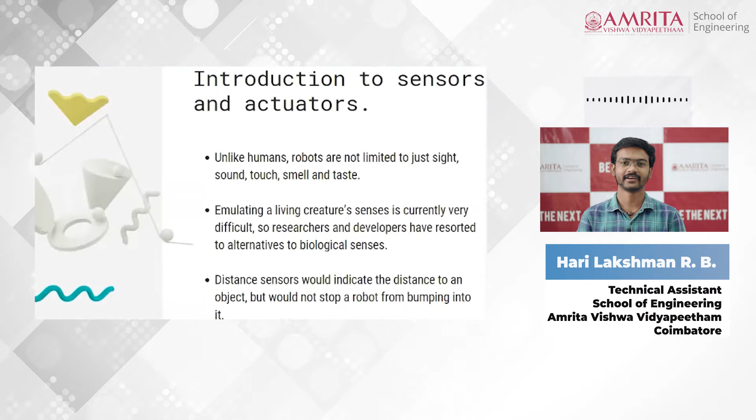A robot with only sensors is just a machine which has nothing but sensors, but it should be programmed and enabled with a proper data set for understanding its environment and itself.

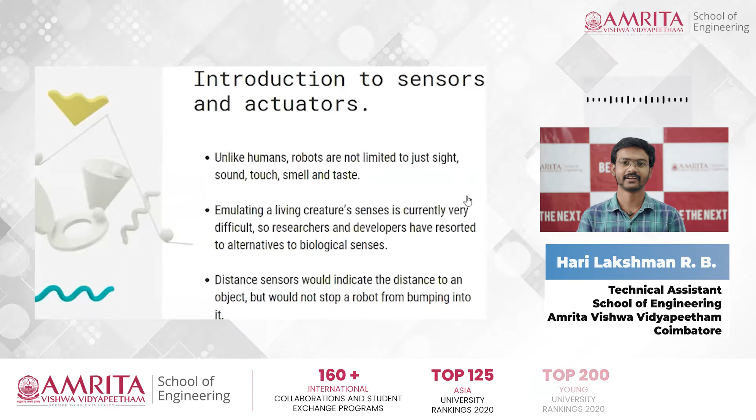The motors that create motion in a robot's articulations are called actuators. There are generally five types of actuators used in robot projects or robotics. I'll be sharing about these five types in the later slides.

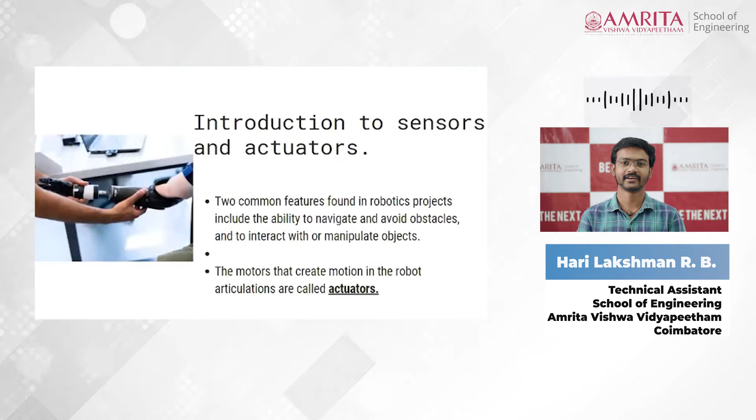Types of actuators can be separated into two categories: based on their energy resources, and based on general types. As general types, as shown in the image, we have DC motor, servo motor, stepper motors, linear actuators, and solenoids. Based on energy source, we have divided actuators into four types: pneumatic, hydraulic, piezoelectric, and some miscellaneous types also. I think you could remember these actuator types, some of which I mentioned in earlier sessions 1 and 2.

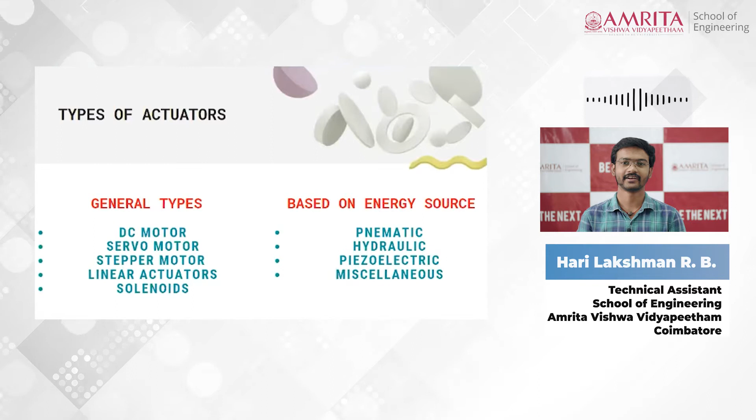We covered pneumatic and hydraulic, how they work and what the difference is between them. Based on the energy source: in a pneumatic system, the energy source is air, and in a hydraulic actuator, the energy source is hydraulic fluid, which can be water, any kind of oil, or what we generally call hydraulic fluid.

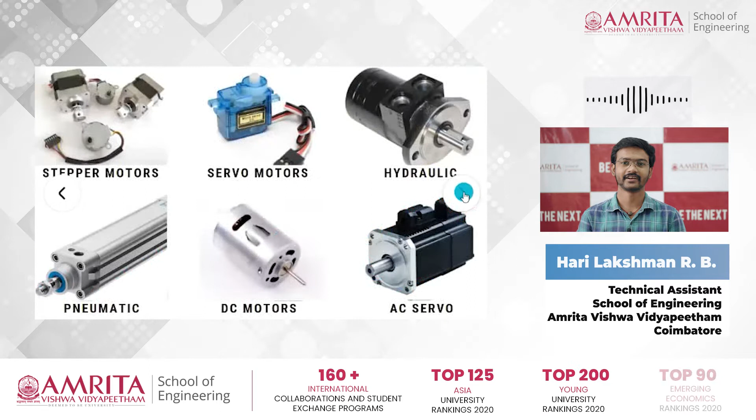We'll be looking into each of a few types of actuators in detail in this session. I hope you could see the image of what a DC motor looks like. A DC motor's output shaft is often mounted onto a pinion or spur or any other type of gear.

You don't need to be worried or confused about what a pinion or a spur or what type of gear it is. As you can see in the image, there is a white projectile outside the main body — a small white gear. That's the small gear which we call a mini gear or micro gear, attached to the motor, and the stick popping out from the main body of the motor is what we call the pinion.

That's how it looks. So it is generally geared to an electronic speed controller that sets the motor speed and direction of rotation. DC motors and other actuators are available in a variety of sizes, as you could see in the image, and also have a variety of torque handling characteristics.

Torque is basically a force which we call into action when an object is in rotation. Just make a note of this, and you can Google it, or if you're an engineering student you would have already understood what torque is. It's technical, but you don't need to study all of it. I'll be explaining what a DC motor is and how they are used in this session, not only about DC motors but also about a few types of actuators.

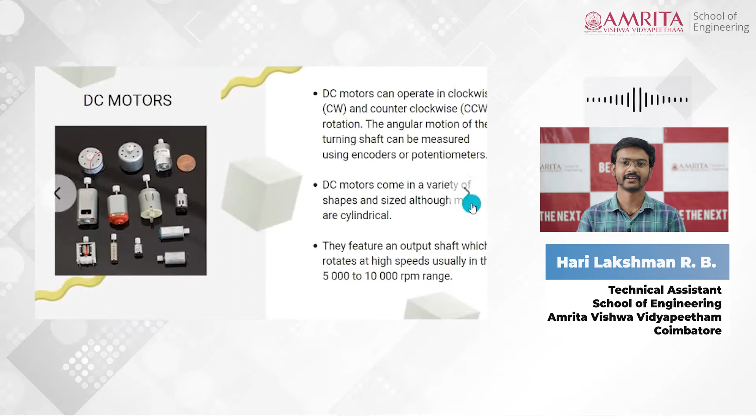Now let's look into servos. Broadly, servos are used everywhere. There are actually two types of servo in general: you can call it a hobby or RC servo, and the other is the industrial servo.

A servo is basically a component with a DC motor, where the output shaft and control circuitry are packaged into one single unit. Servos usually provide rotational movement, except for continuous rotation servo variants that can rotate 360 degrees. As I said earlier, there are two types: RC servos and industrial servos.

RC or hobby servos are types of actuators that rotate to a specific angular position and were classically used in inexpensive remote controlled vehicles for steering purposes and controlling flight surfaces. Now that they're used in a variety of applications, the price of hobby servos has gone down significantly, and the variety has increased, like the sizes of servos, the technologies used, and also the strength of the servos.

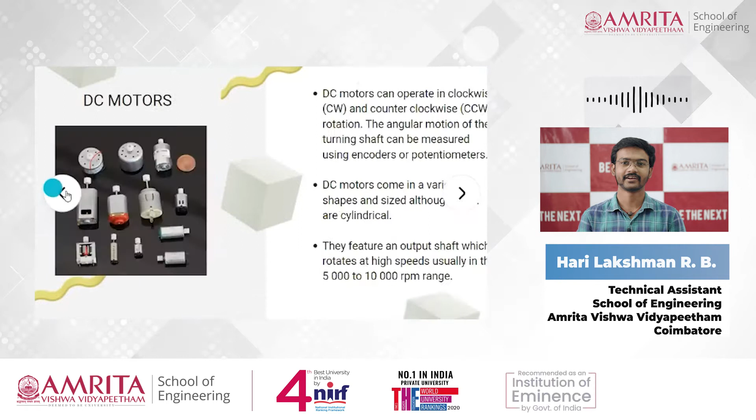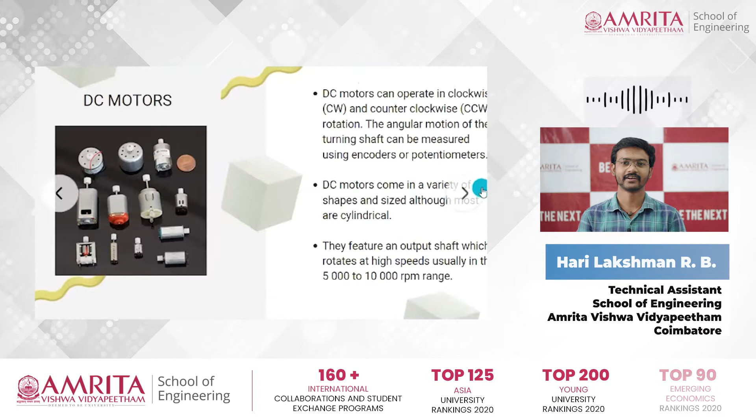The common factor to most servos is that the majority only rotate about 180 degrees. A hobby servo motor actually includes a DC motor, a gearing system, electronics, and a rotary potentiometer in order to measure the angle. As I mentioned earlier with DC motors, the angular motion of the shaft can be measured using encoders or potentiometers. Same goes for servos, where a potentiometer or an encoder is built into the RC servos or hobby servos in order to measure the angle.

These servos generally have three wires, as you could see in the image, though it's a bit hazy there—you could notice three wires coming out of the motor. These three wires are for ground and voltage purposes and for control purposes. Two wires are for positive and negative terminals, and one wire, which in general looks yellow, is used for the control pulse, in the sense that it's attached to a microcontroller or any kind of controller, and the angles or commands are given from the controller to the motor through this yellow wire.

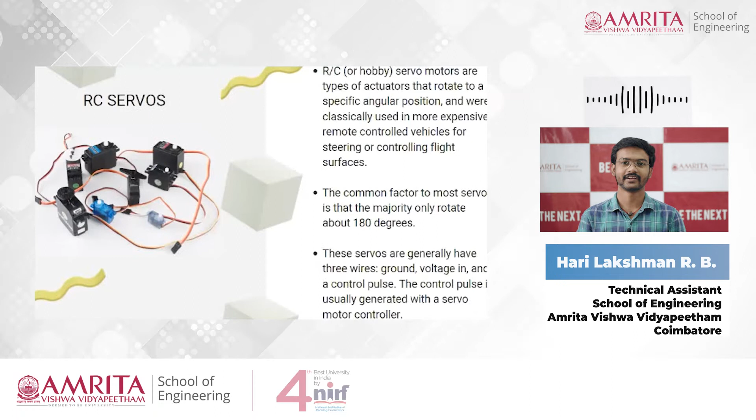In general it is yellow, but the color may be different for different servo motors. The control pulse is actually generated with a motor controller. A robot servo is a new type of servo that offers both continuous rotation and position feedback, and all servos can rotate counterclockwise as well as clockwise.

Now that we've covered servo motors, let's look into what an industrial servo means. An industrial servo is controlled differently than the hobby servo motor, and it is more commonly found on very large machineries. An industrial servo motor is usually made up of a large AC motor, which is sometimes three phase, a gear down, and an encoder which provides feedback about angular position, and speed also comes in within an industrial servo motor.

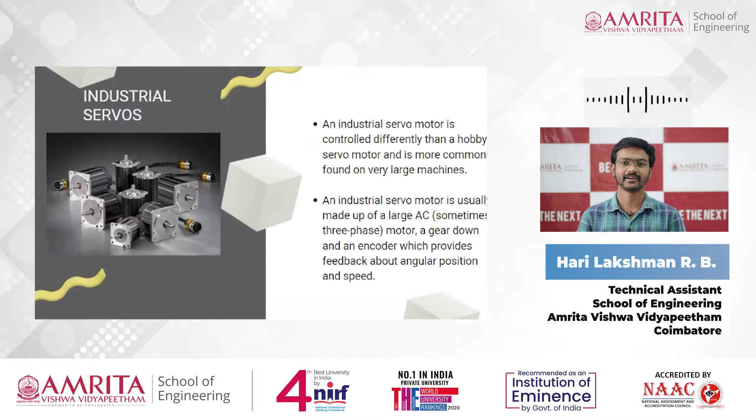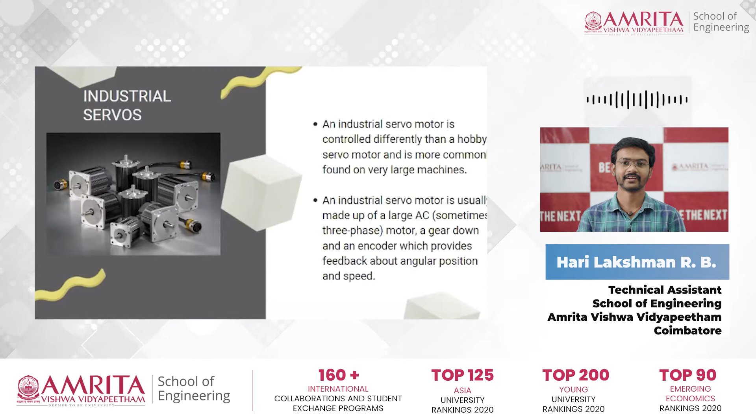These motors are rarely used in mobile robots because of their weight, size, cost, and complexity. Because these servos are generally very large, and they provide a very high cost and complexity, and they also weigh a lot, you might find an industrial servo in more powerful industrial robotic arms or very large robotic vehicles.

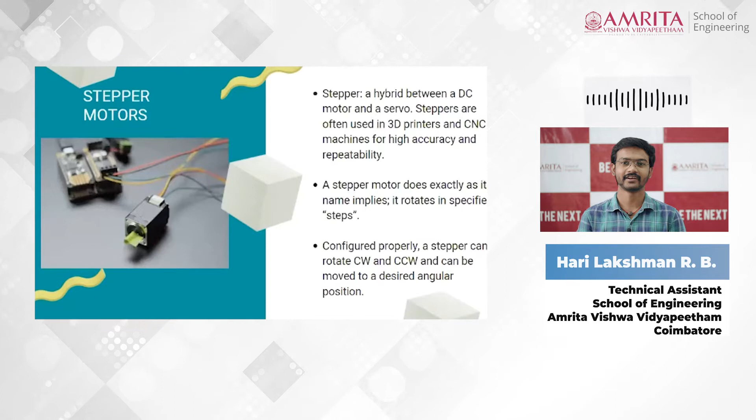Most stepper motors do not include gearing systems, so just like a DC motor, the torque is often low. Configured properly, a stepper can rotate counterclockwise and clockwise and can be moved to a desired angular position precisely. The main advantage of having a stepper motor is that precise angular position can be obtained because it moves with specified degrees, or the steps which it takes are based on the degrees which we give. The degrees in the sense are angles 0 to 360.

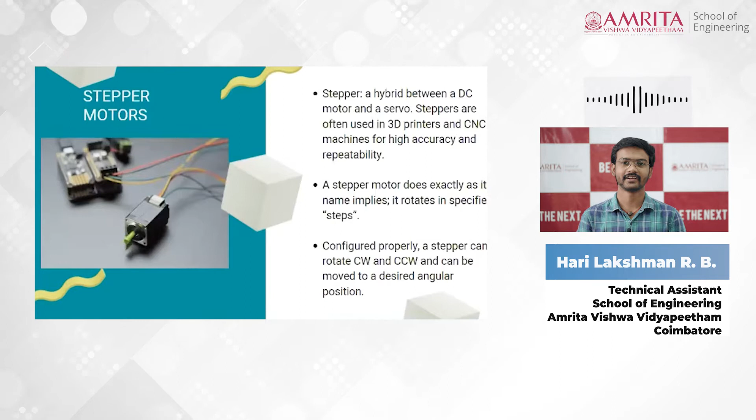Stepper motors are often used in 3D printers, CNC machines for its high accuracy and repeatability. It is often where a low torque output is also sufficient. In general, a stepper motor is nothing but a hybrid between a DC motor and a servo motor, because like a DC motor it doesn't have any gearing system and it provides low torque, but like a servo motor it provides accuracy, and this is a bit more accurate than a servo motor.

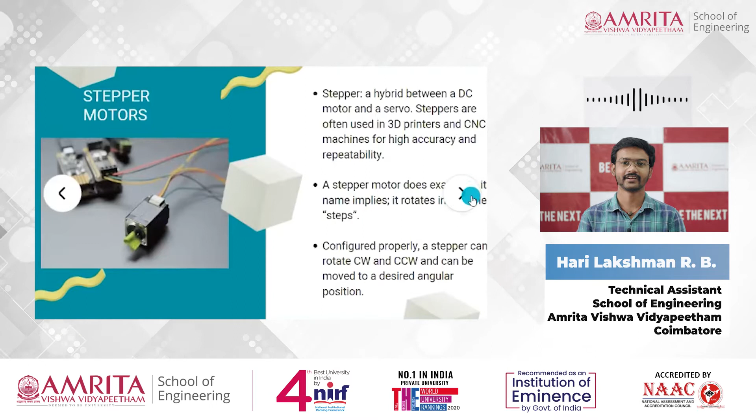Now let's talk about linear actuators. A linear actuator is similar to a servo but provides linear motion. It is often achieved through linear mechanisms such as worm drives. Mechanical guys obviously know what a worm drive is. Please do make a note of it if you don't understand what a worm drive is, because if I explain a bit about it, it will take much more time, as I have a lot of scope to complete in this session. So a DC linear actuator is a type of linear actuator which I'll be concentrating on as of now.

It is often made up of a DC motor connected to a lead screw. As the motor turns, so does the lead screw also turn. A traveler on the lead screw is forced either towards or away from the motor, essentially converting the rotating motion to a linear motion. So that conversion happens here - I mean the rotation to a linear motion.

Some DC linear actuators incorporate a linear potentiometer, which provides linear position feedback. This means that a linear potentiometer is used for measuring the position of the lead screw or the position of the actuator. As you could remember in the earlier slide, I mentioned about encoders and potentiometers - those are used to measure the angle and distance, and that's what feedback means.

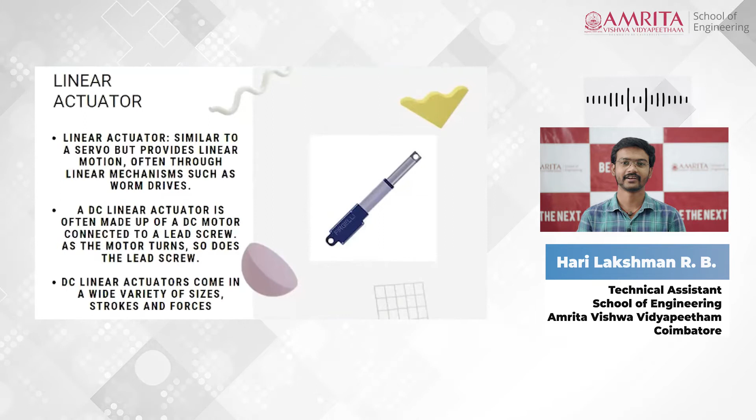In order to stop the actuator from destroying itself, many manufacturers include a limit switch at either end, which cuts the power to the actuator when it is pressed. So DC linear actuators come in a variety of sizes and strokes, and in different forces also.

Multiple coils or mechanical arrangements would be required to provide motion in two directions. A solenoid's stroke is usually very small, but its response speed is very fast.

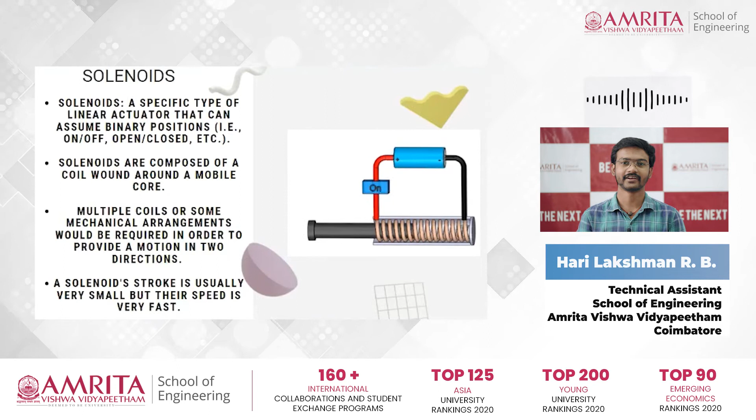The strength depends mainly on the coil size and the amount of current passing through it. Solenoids are typically used in valves, latches, locks, and push buttons, usually controlled by an external microcontroller. These actuators are generally used for on/off, or binary position purposes.

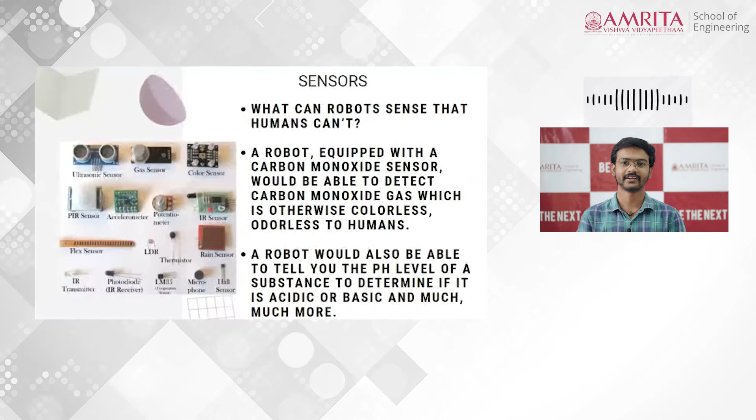So what can robots sense that humans can't? That's the first question we need to think about. Although a robot cannot tell you if a substance tastes good or an odor smells bad, the steps involved in analyzing chemical composition can give it far more information than a normal human being. A robot equipped with a carbon monoxide sensor can detect carbon monoxide gas, which is otherwise colorless and odorless to humans.

These types of sensors are used for purposes where humans cannot sense certain things - that's where robots come into play. A robot would also be able to tell you the pH level of a substance, to determine if it's acidic or basic, or much more.

Take for example a chemical company or industry where acids are used, or even research labs - most of these use sensors to smell or detect gases, or find the pH level of a liquid.

pH is used to find whether a liquid is highly acidic or basic, or to determine the exact precise pH value. In some cases, gases can be detected by a robot which could be hazardous for humans as well as odorless.

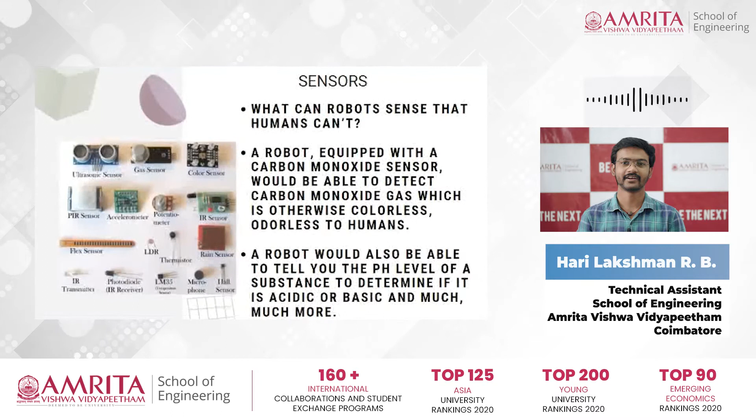So that's it and done. Now we need to think which type of sensors our robot actually needs. What types of sensors are available, and which ones does your robot actually need to serve its purpose?

You need to first ask yourself: what do I want or need the robot to measure, or what is the main purpose of the robot, and what different types of sensors should be attached to a robot in order to ensure it completely understands the situation.

There is a good chance what you have in mind will not fall nicely into these categories. So we'll break down the types of sensors into different parts, starting with contact type sensors. Under contact sensors I'll discuss a few, and under distance sensors I'll discuss a few, and like that I'll cover the most important sensors in this session.

Push buttons or contact switches, buttons, and contact sensors are used to detect physical contact between objects, and they're not restricted to humans pushing buttons. Bumpers on a robot can be equipped with momentary push buttons, and whiskers, like a cat has, can be used to sense distances. There are advantages and disadvantages: it is low cost, easy to integrate, and more reliable than other types of contact sensors, but it is single distance measurement.

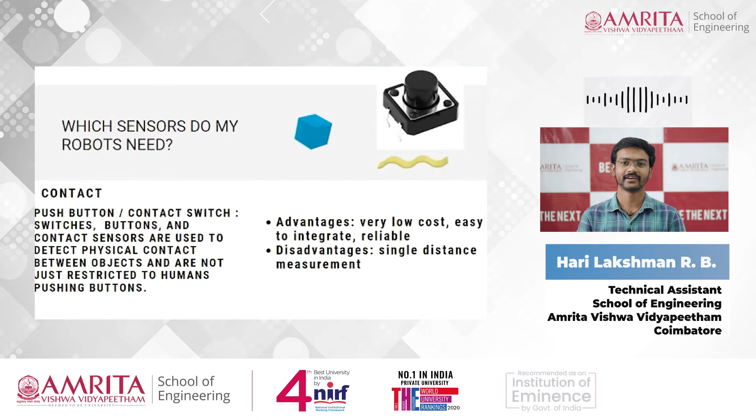The next would be the pressure sensor. As you could see in the image, that's an example of a pressure sensor. Unlike a push button, which offers one of two readings, on or off, a pressure sensor produces an output proportional to the force that is being applied to it. So that's the main working principle here.

How does a pressure sensor work? It's simple. If you press or apply a certain amount of force onto the sensor, it reacts proportionally, sensing how much pressure or force is being applied, and produces that force as a result. We call this a feedback. Feedback is nothing but getting the points from someone and using it.

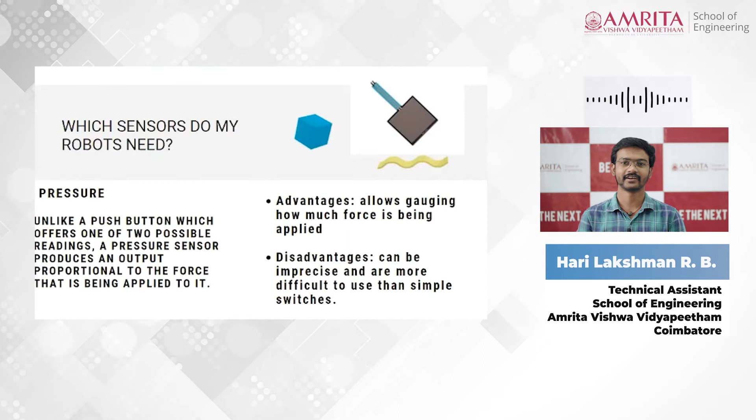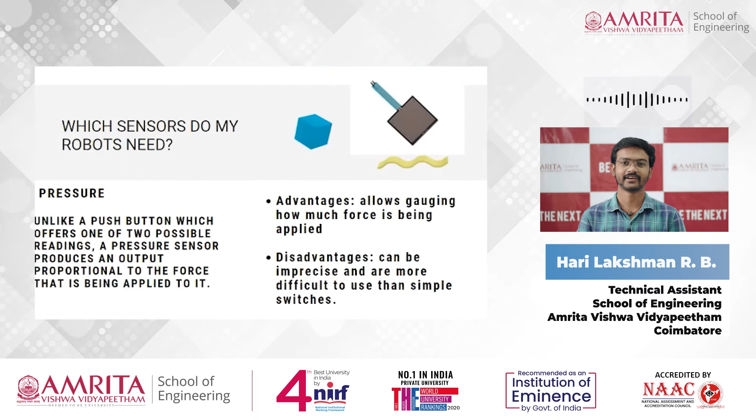So here are a few advantages, like it allows gauging how much force is being applied, and a few disadvantages, like it can be imprecise and more difficult to use than simple switches. It cannot be used like the normal switch in your house, as it won't be a binary 0 and 1 household switch. I think I've covered a few lines about switches also.

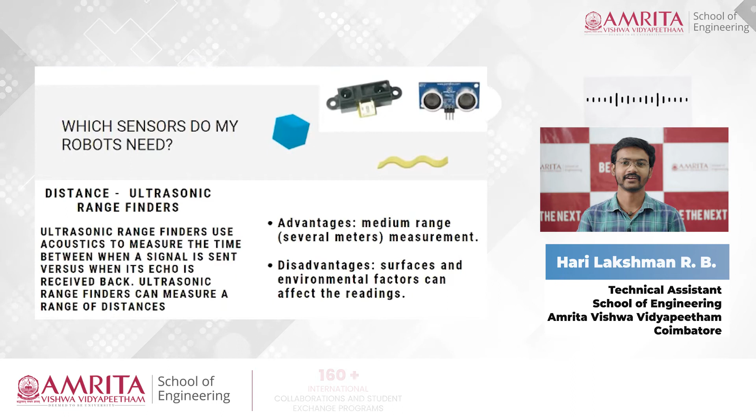Now about distance sensors. Ultrasonic rangefinders are a type of sensor which use acoustics to measure the time between when a signal is sent from the sensor versus when its echo is received back. The ultrasonic sensor releases a sound or signal which reflects off a body or object and comes back to the sensor, and with that time duration, the sensor senses the distance between the object and itself. As you know, the primary formula is: speed equals distance by time.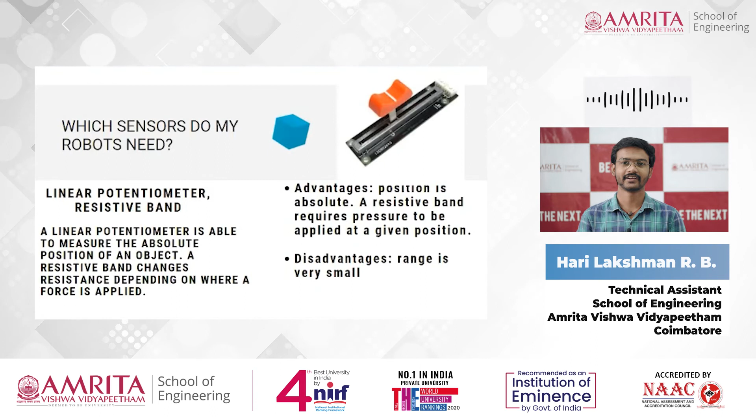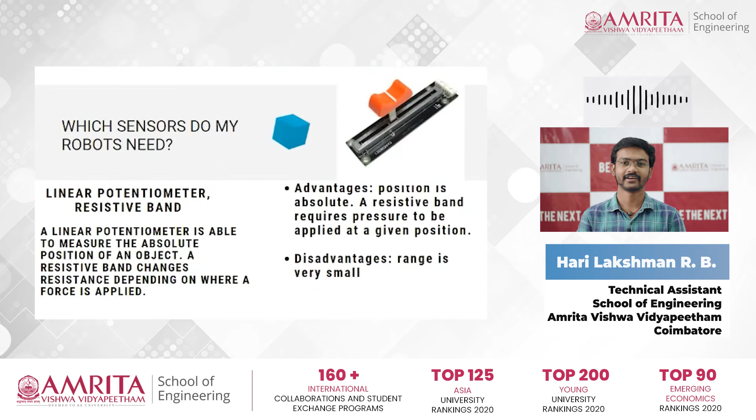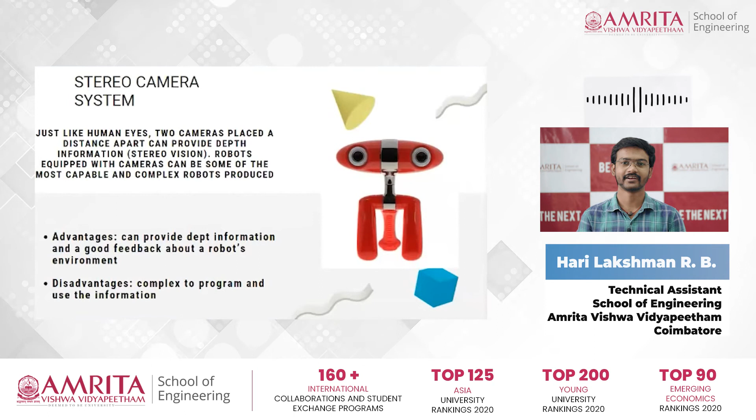Now let's talk about what a stereo camera system is. In a stereo camera system, just like human eyes, two cameras are placed a distance apart, and they can provide depth information. Robots equipped with such cameras can be among the most capable and complex robots produced. The camera, combined with the right software, can provide information about the color and the object that it sees. Sensors need a set of programs or codes, and also a certain level of database in order to identify and work. Even cameras only work when connected to a controller.

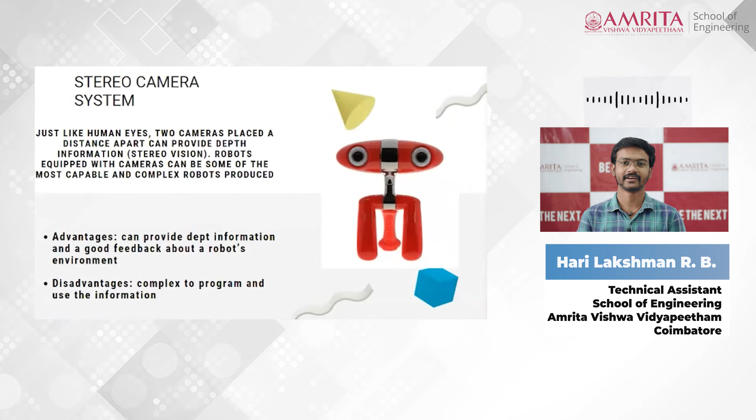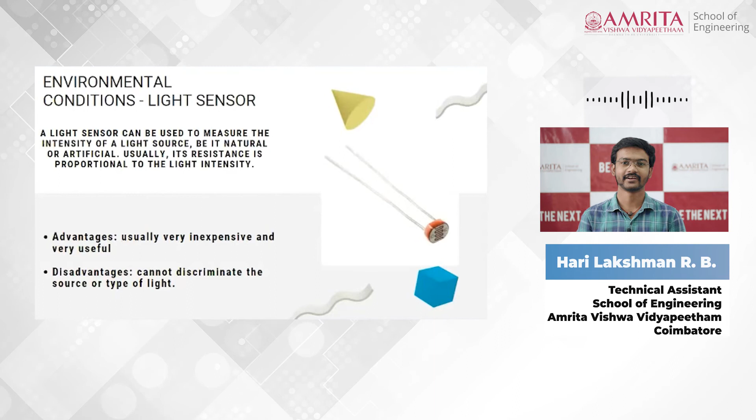The next main type of sensor is based on environmental conditions. Let's start with light sensors. A light sensor can be used to measure the intensity of a light source, whether natural or artificial. Usually it has a resistance proportional to the light intensity. How does that work? The amount of sunlight that passes through its body gets cut down, and the remaining part of the signal is captured. The position, the wiring, and other environmental factors are all considered in light sensor applications.

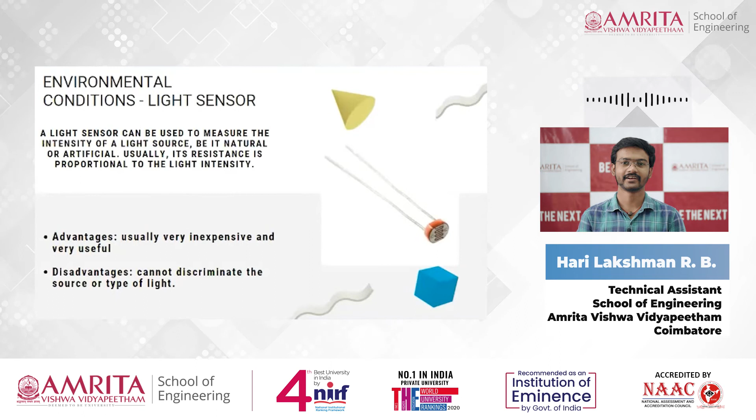The next type of environmental conditional sensor is the sound sensor. A sound sensor is essentially a microphone which turns ambient noise level into a proportional voltage. A more complex board can be used to process the data from the microphone for speech recognition. You can see a few examples of how a sound sensor looks.

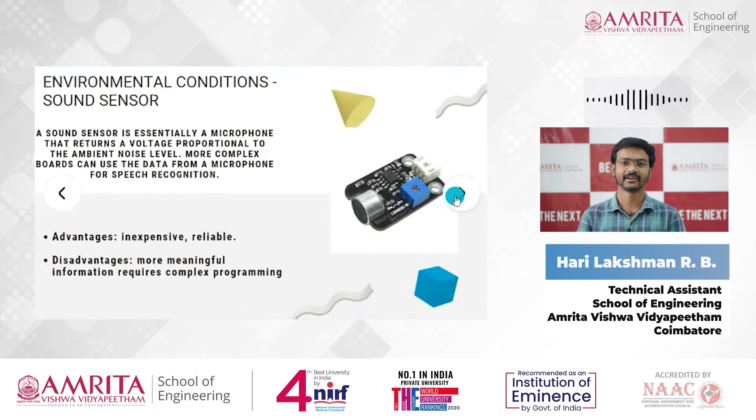So, covering the primary types of sensors and actuators, we've also talked about sensors based on their environmental use. Now we'll look into a few miscellaneous sensors which are in steady growth and have been used in high-end models.

First, let's start with voltage or current sensors. Current and voltage sensors do exactly as their name describes, because they measure the current or voltage of a specific electric circuit. This can be very useful for gauging purposes, such as how much longer your robot will operate based on battery voltage. If your motors are working too hard, then there may be a problem with the current part.

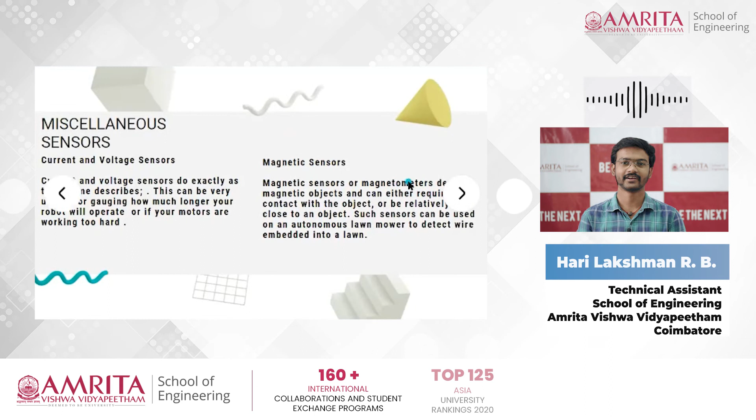Now the next miscellaneous sensor is the magnetic sensor. Magnetic sensors or magnetometers detect magnetic objects, and that can either require contact with the object or be relatively close to it. Such sensors can be used on autonomous lawnmowers to detect wire embedded in the lawn. That's the primary robot built to use it, and most of them are used abroad rather than in India, since a sufficient number of gardens are not provided in India for these robotics purposes.

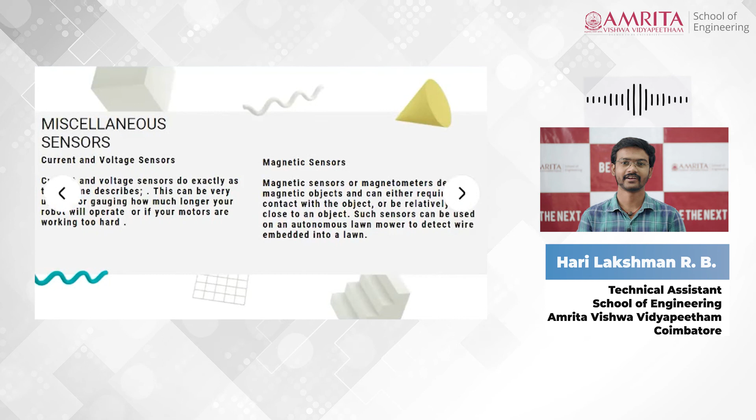Next is the vibration sensor. Vibration sensors detect the vibration of an object using piezoelectric or other technologies. Whenever I mention piezoelectric or related topics in robotics, they all fall under the main subject of vibration and magnetic sensors. So, talking about vibration sensors, they detect the vibration of an object using piezoelectric or other advanced technologies.

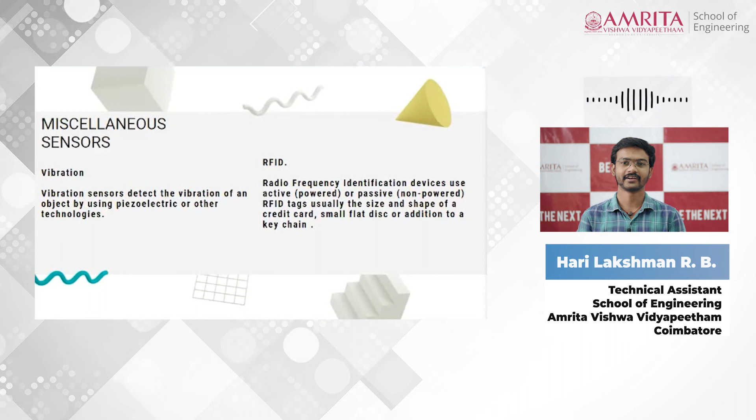Next, I'll finish up by mentioning the RFID sensor. This type of sensor is used for identifying devices, using active or passive technology, meaning it can be powered or unpowered, static or moving. For both types of objects, it can be used for identification. RFID tags are usually the size and shape of a credit card, a flat disk, or an addition to a keychain - these are the sizes or tags where RFID tech is used.

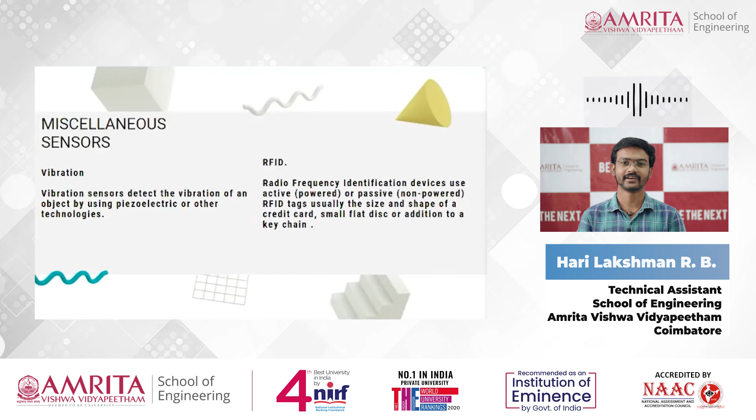When the RFID tag comes within a specific distance of an RFID reader, a signal with the tag's ID is produced. It's somewhat like a QR code, but not a QR code - it looks like RFID technology adapted into that kind of QR code format, and that's called RFID tags.